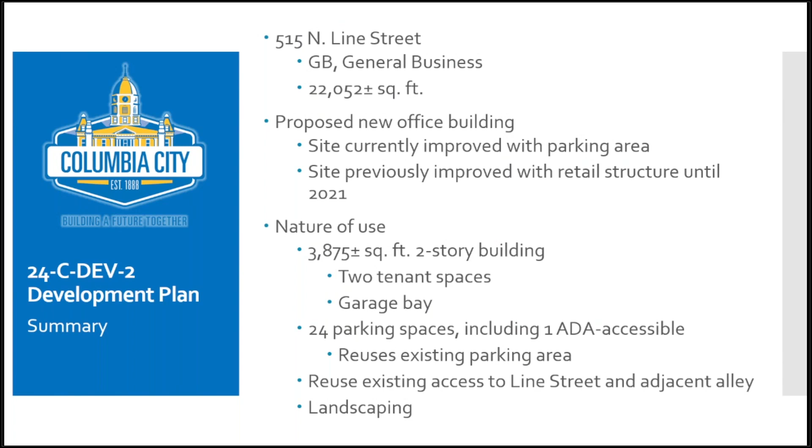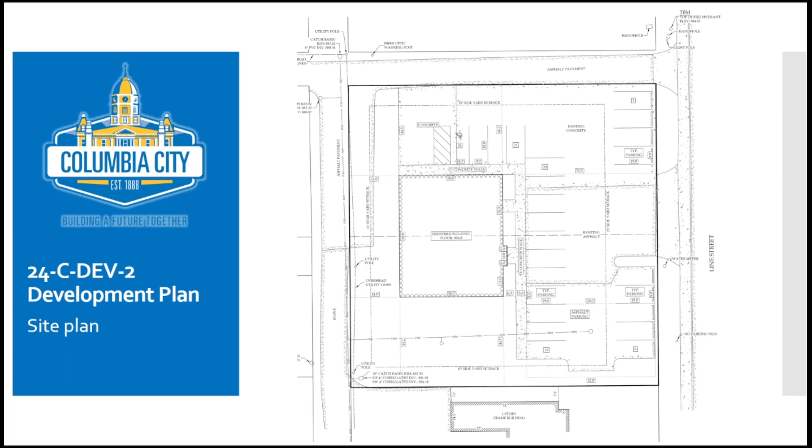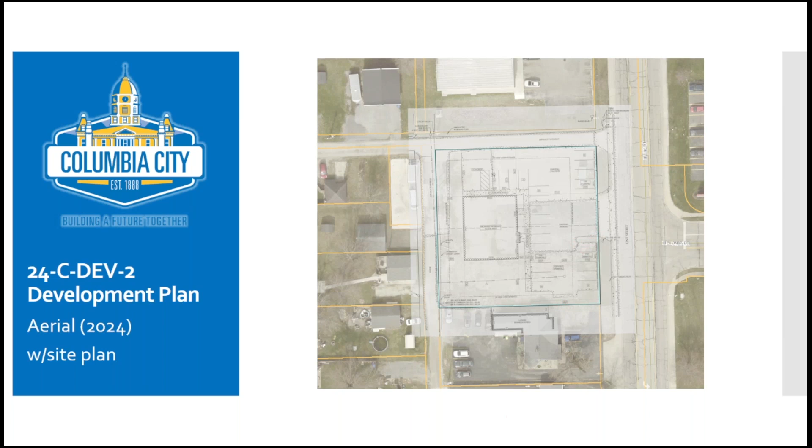But the parking code, landscape code, does call for more landscaping, much more detail listed in the staff report. Basically, street trees need to be along Line Street, and then additional landscaping with those street trees, at least here, and some along the south side of the parking area. The Planning Commission does have the authority to vary that, as well as we've traditionally allowed some variance with the setbacks for parking in conjunction with that.

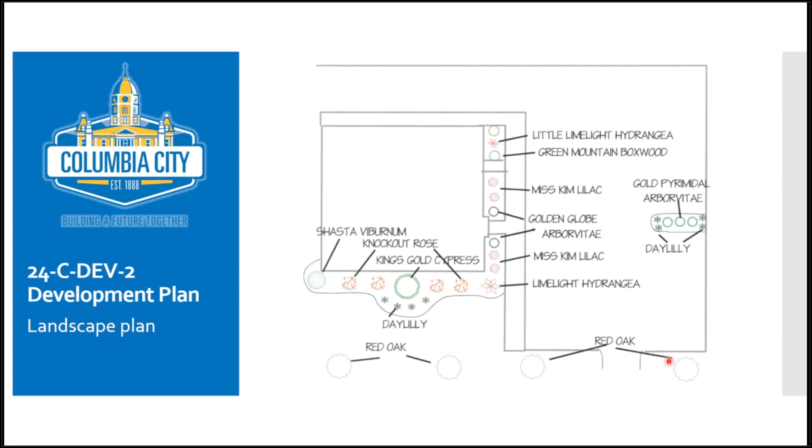However, I think what's being proposed is still shy of what we'd be looking for, even as an alternate landscape plan.

Building elevations - I don't remember what the siding materials are. It's stated in here: vinyl siding and trim with stone veneer wainscoting. So the lower portion there below the windows would be stone veneer, upper portion would be vinyl siding.

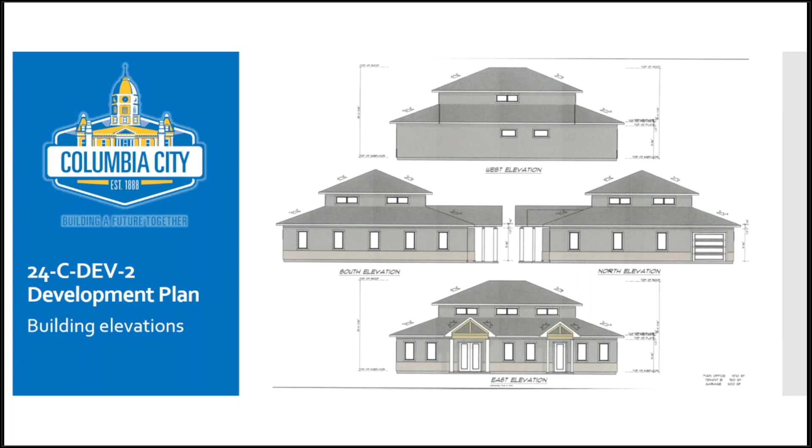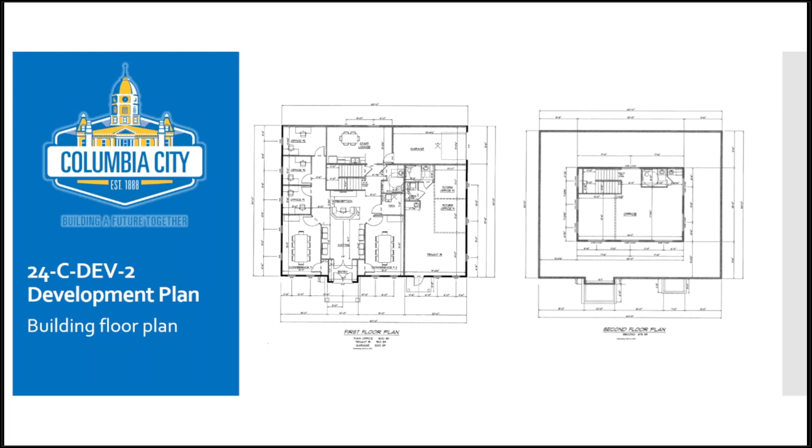As you look at that east elevation, you've got two entrances, one for each of the tenant spaces, also reflected here in the floor plans. Tenant B is shown as vacant right now with future offices sketched in. The main tenant space, A, is actually 2-story with an office on that second floor.

Reminder about the development plan review criteria.

And then finally, staff suggested conditions. 1 and 2 are standard, regarding if this is approved, that it be approved as presented, and then also addressing any outstanding comments from reviewing agencies. Soil and Water Conservation District, MS4, was the only one with fairly substantial comments, and they were pretty small in number.

3, 4, and 5 are standard conditions regarding exterior lighting, and then any dumpster - not that there is any proposed with this, but if there were any, that would be fully enclosed.

Number 6 is a suggestion that in addition to the proposed landscape plan, landscape beds be added along the east edge of the proposed parking lot, which would also include at least 4 street trees by the measurement of 35 foot on center. That yields 4 street trees, so basically 2 on either side of the driveway would be most logical. Also shrubs and/or perennial flowers.

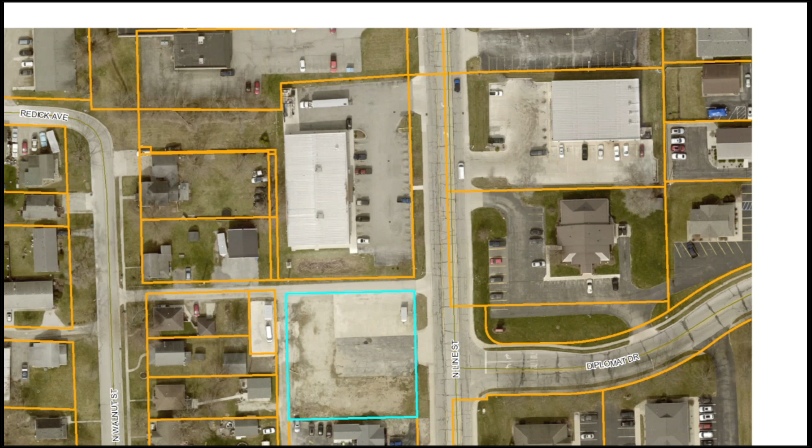That is similar to what we did with Dollar General next door. You can see there the sidewalk that leads from Line Street, and it is striped, although it doesn't show up very well there, striped across to their front door. So something similar - striping may not be necessary here because of the lower volumes of traffic in the parking lot, but again, getting those who wish to walk from the sidewalk along Line Street to the front door of the building is the goal.

Number 8: the width of the existing driveway onto Line Street is approximately 40 or 41 feet. That is well in excess of the 24 feet that is typically called for a driveway. However, because of the angles, because it is reusing existing parking, I'm suggesting a maximum of 32 feet. That allows for 3 lanes and some turning movement, particularly if you have to make a U-turn. But again, the code calls for 24 feet, so no need to have that 40 feet.

That said, similar to what had been done a little farther south on Line Street, it may be acceptable to leave the drive apron and simply remove some of the asphalt in order to narrow that width down, because you've got sidewalk in that curb and so on. So you'd be replacing sidewalk - it's not just removing and calling it good, like it would be with the parking area itself.

Also dealing with parking, the eastern tier, northeastern tier, it appears that with the removal of the extra width as a driveway, and even without that, there's enough room to get the minimum 5-foot setback on the northeast corner. So shift all the parking south by a couple of feet to get a 5-foot setback along the northeast, which would be compliant with the setback requirement code.

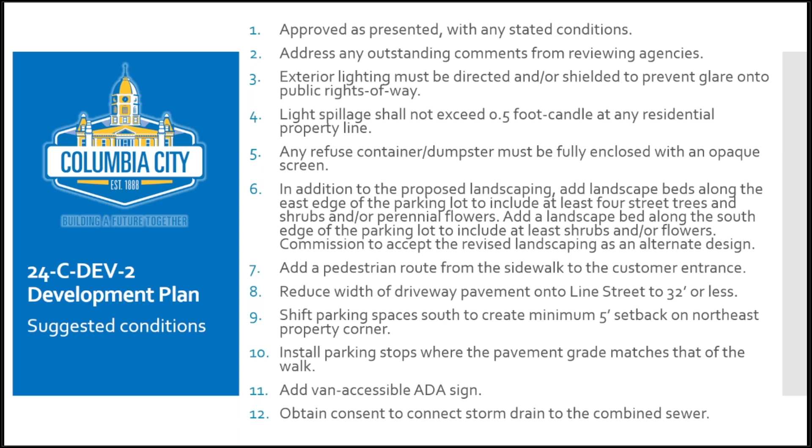I have one. What was the existing apron? Can you pull that up? Yep.

So the existing apron there, as you measure it from there to there, is approximately 40 feet at the right-of-way line. So what I'm suggesting is just cutting back or adding a landscape island or something in one of the corners in order to address that. That's why I was curious if they were just using the existing or not.

Nathan, the existing sidewalk, is it level with the parking lot now? Which sidewalk are you referring to? The one on the east along Line Street? Okay, the actual one along Line Street.

I do not recall. Let me see if I can pull up Google Street View, because I know they've been along Line Street. For some reason I'm thinking it's above. Do you know? I think it's a curb. That's why I think it's 4 or 5 inches back above, and the curb goes straight into the sidewalk.

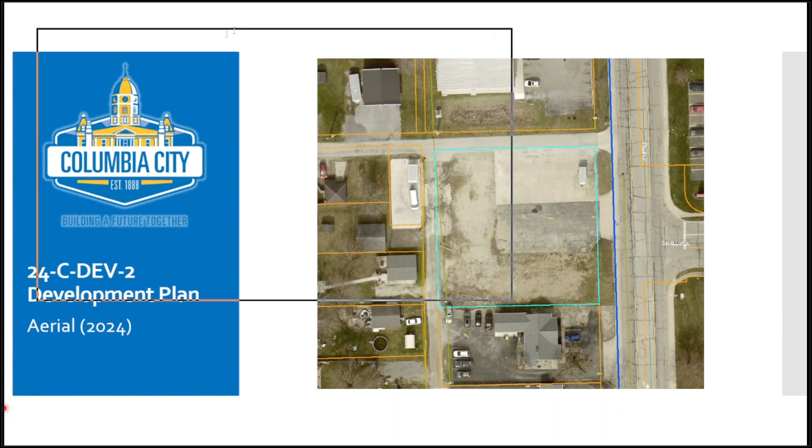So it's a curbed sidewalk here, and you do have some depression where the driveway is. Actually, it's kind of depressed all the way up through here. As you can see out in front of Dollar General, it gets higher, and then as you get on the south side here, it gets higher. So it's relatively low on the northern two-thirds of this site.

And while we're at it, there's that sample. Any other questions for Nathan? Okay. Gentlemen?

All right, my name's Ryan Pepler. I work with Walker Associates. My address is 3490 North Etna Road. We did the engineering plans for Andy and Brandon.

Just a couple things that Nathan was talking through, and I'll address some of these. As far as the signpost, the plan for that is to be taken down, so any signage would be on or near the building. Yeah, okay.

Another thing, on the east side of the building, you mentioned that the sidewalk was at grade with the pavement, and it's not. North side. Okay, north side, just in one spot though. What I measured was the ADA accessible space, which makes sense. There's an access strip for that, which also makes sense. And then the two adjacent to that,

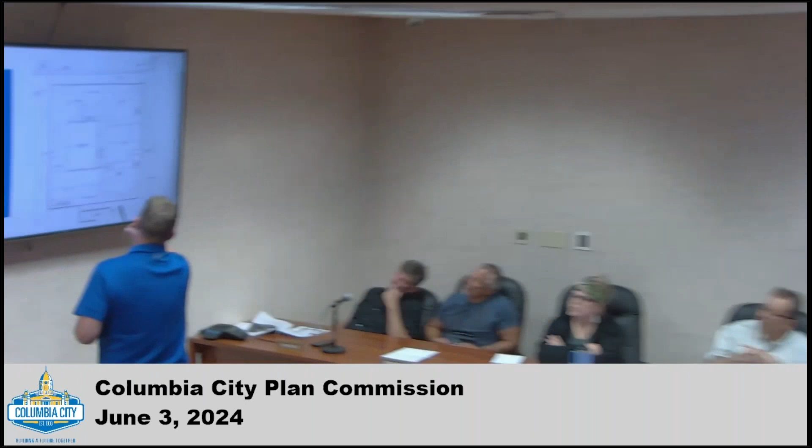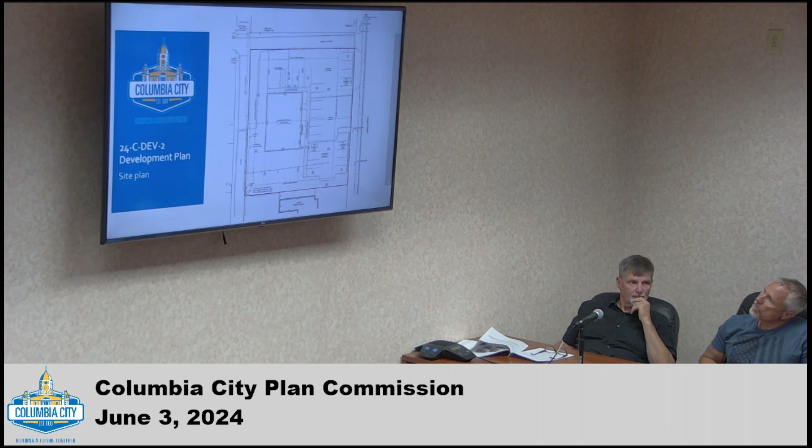Basically, everything here and up here, that's all existing. So the only new area would be this parking area, and then a new concrete approach for large truck deliveries and anything like that might happen.

Even with those new areas, we're actually reducing the amount of hard surface. Back when there was a building on site, this was nearly completely covered in hard surface. Now there will be grass and landscape areas down in the southwest and south part, the places that show up on the landscape plan.

There's a small drainage issue down in the southwest part, on the neighbor's property to the south. With the plans we're doing here, we're actually helping that situation for the neighbor by putting in a yard drain just south of the building, between the building and halfway down to the property line. That water will be diverted towards a catch basin and out to the existing storm line.

I don't know if you have something up with just the area. Sometimes the aerial will show where gravel shows up, or you can kind of pick up where that drainage issue might be. Yeah, it's kind of hard to tell, but these are new aerials, aren't they? March, yep. Maybe it was the previous one. Anyway, so we are helping with the drainage on that part.

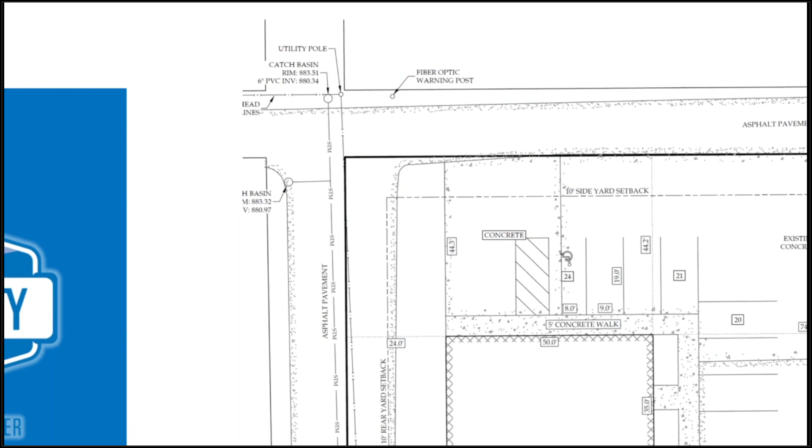And your new catch basin will be right out in the corner of the building, basically. There'll be one in the middle of the parking lot that will pick up everything in the parking lot and take it west. There's another yard drain just south of the proposed building that will also pick up there, and everything will go to that storm line in the alley.

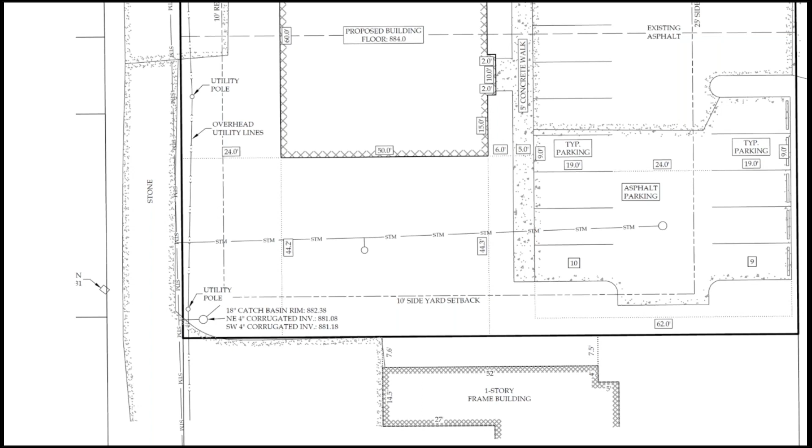Reducing that access from 40 feet to 32 feet, or is there truck and trailer traffic that will cause some hiccups too?

No. Yeah, I don't have the exact measurement, but it looked like there were 3 sections of concrete on that street view. Whether that would be, it's approximately maybe around 32 feet would be my guess.

But again, you're removing— yeah, there's the, going back in time. Yeah, I was gonna say. Okay, there you go.

So it would be 32 feet would put you roughly here. Yeah, if you were to take both sides off, though.

The idea of using that roughly 8 feet of width as pedestrian access, I think is maybe a good combo suggestion, but exactly what that looks like, I'm not sure. Paint by itself would be sufficient, but I think that might be a good way of reusing pavement.